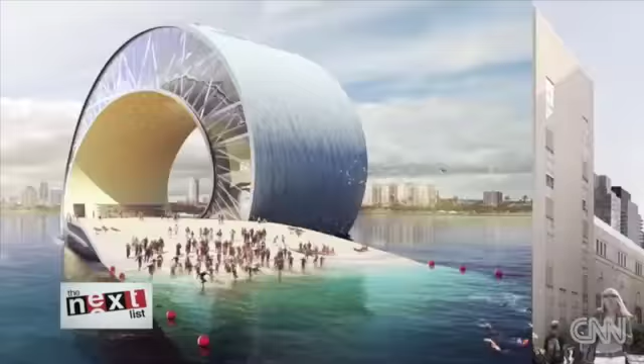If we could do anything, what would we really do? What are the things that we lack in our city? What are the things that we would like to do but that we can't? And then make them happen. That's exactly what architecture should be all about.

In the big picture, architecture is the art and science of making sure that our cities and buildings fit with the way we want to live our lives.

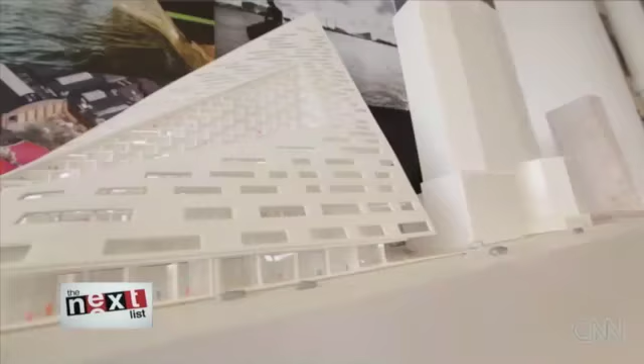The West. This is the West 57th Street project. As you can see, it's this mixture between a skyscraper and a courtyard building.

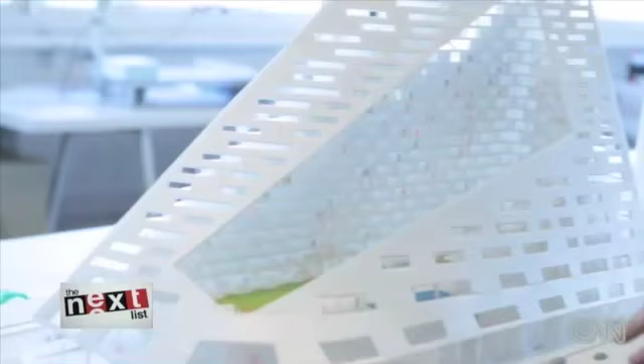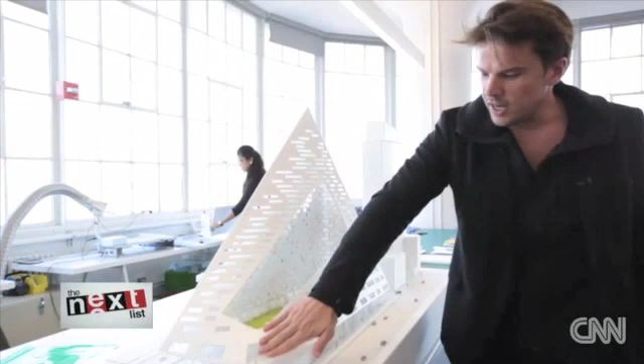To open up the courtyard for the views, it tilts from being horizontal to being almost vertical, opening up the entire courtyard for the sun from the south and the west, so you'll be able to see the sunset over the Hudson River. The bottom, like the southwest corner, is 42 inches, so it's really the height of a handrail. And here you're up at like 430 feet. So you have this incredible range from the human scale to the city scale in one single building.

It's a big idea that caught everybody's attention. It's the kind of idea that when you see it, you say, how come nobody's thought of it before? I describe him as a genius. He doesn't fit what you think of as an architect. He's brash, he's very young, but he is, I think, a true genius in the sense of being able to see designs in his mind and put them down on paper better than anybody I've met.

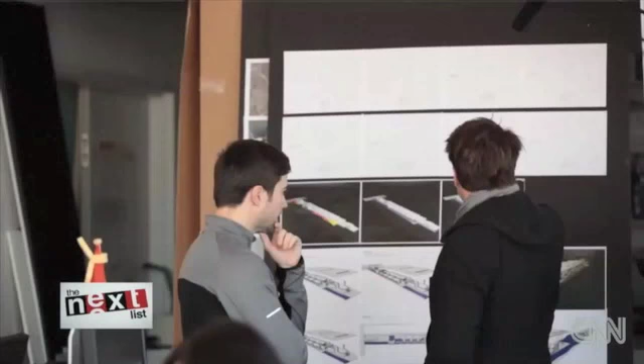Today, a lot of people have this feeling that they ask, why are all modern buildings so boring? Essentially, modern buildings have degenerated into these big boring boxes where the architecture is very passive, and all the quality that makes the space inhabitable is this onslaught of machinery that pumps air and light into the building. So what we're interested in is what you could call engineering without engines.

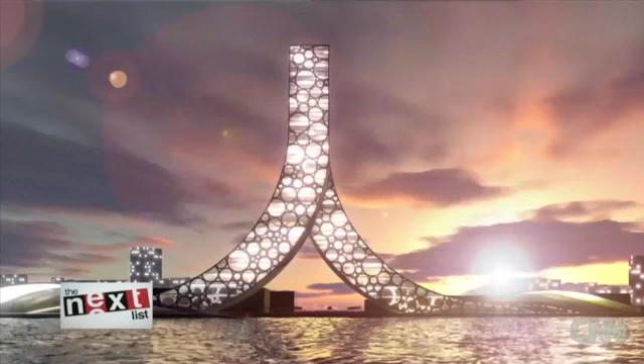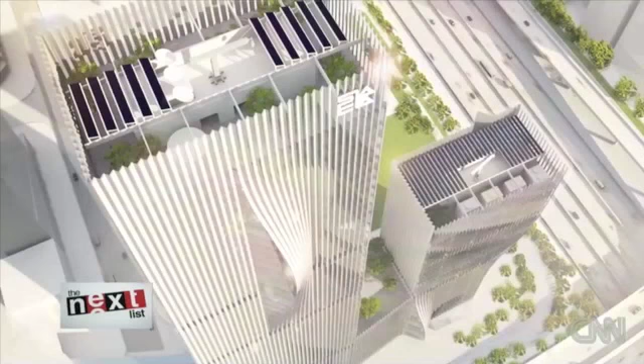We use contemporary technology, our capacity to simulate and calculate the performance of a building, to put that attribute into the actual design of the building - the way it's structured, the way the windows are proportioned, the way it's oriented to either capture the sun or create shade. So in a way, we find new ways of informing the architecture, the design of the buildings. Essentially, what we are interested in is buildings that look different because they perform differently.

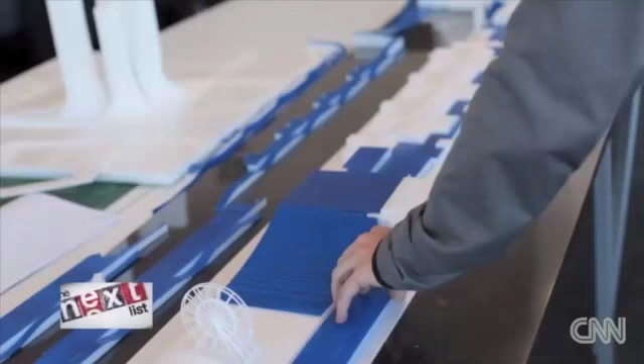Bjarke has that capacity to read deeply into the situation - the zoning, the economics of a project, the constructability of a project - in a way that most architects tend to say, oh, the zoning is constraining. He sees the zoning, I won't say as liberating, but as something that if you master it, you can move on to a higher level.

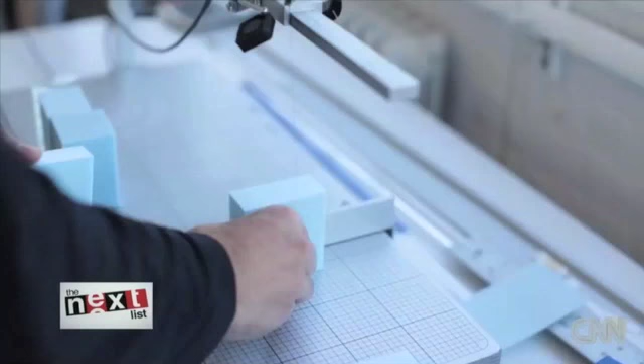I think all projects always start with some kind of anxiety that this time we're simply never going to get there. You have this feeling that maybe it's simply not going to come out, right? No matter how hard you squeeze, it's simply not getting there.

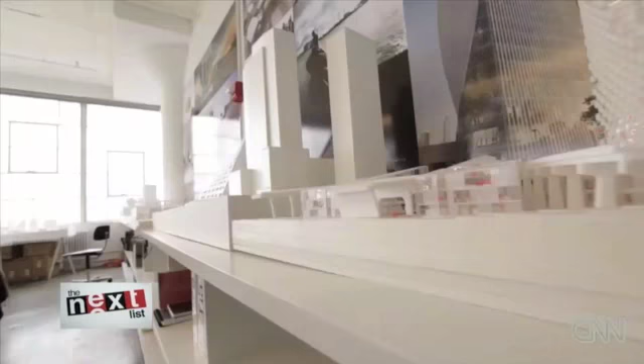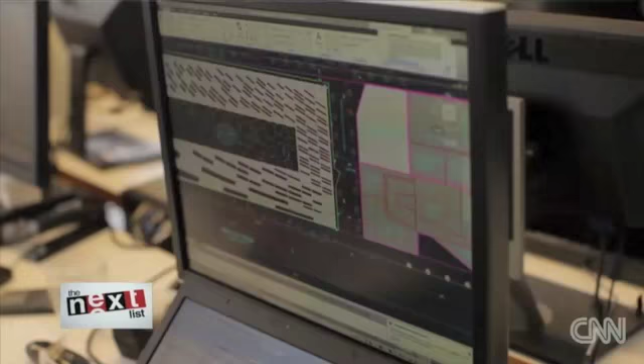So for each project, we might have like even 100 models that are each early attempts to capture an idea in its most blatant form. So no idea is allowed to exist only inside the head of one of the collaborators. It has to come out in a diagram, in a drawing, in a physical model. You might walk around with a brilliant idea inside your head, but because you don't bring it out there, I'll never be able to respond to it. Nobody will be inspired and nobody will be able to inspire.

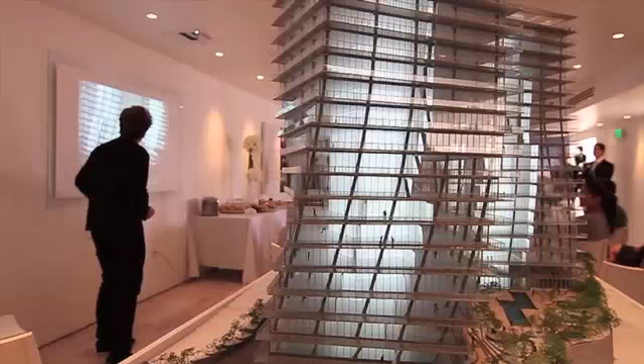It was quite easy to identify what this project was going to be all about, because you have the grove, you have the incredible landscape, and basically the best landscape architect probably in the country, if not even beyond.

We tried also to look at, let's say, the Miami vernacular, and one of the things, because having the pleasure of actually operating in quite a lot of different cities and different cultures and different climates, what we try to do is also instantly acquire some of the empirical intelligence that has already emerged in the local culture.

One of the things that actually works quite well with the Miami condominium is that by having really large balconies, you can combine the possibility of having generous views with having a lot of outdoor space and a lot of natural shade, so that in an environmentally intelligent way you create something that both maximizes daylight, view, sunshine, but also optimizes shade. And then finally, maybe the greatest resource we have right here in the first row out to the water is, of course, the possibility of capturing amazing views.

So we started this basic analysis: by necessarily having two buildings, we could easily get in a situation where, because of the neighboring buildings, on the lower floors, the most blatant way of addressing or capturing the view of the water is by looking straight perpendicular to the waterfront.

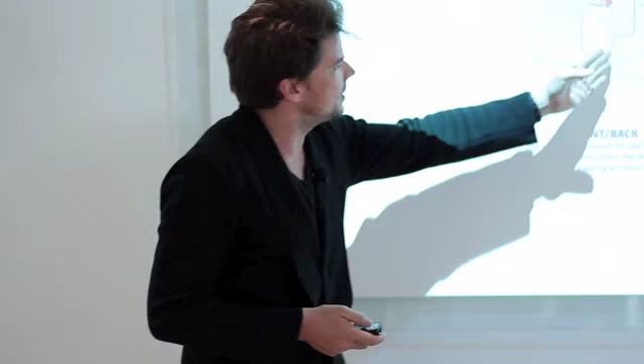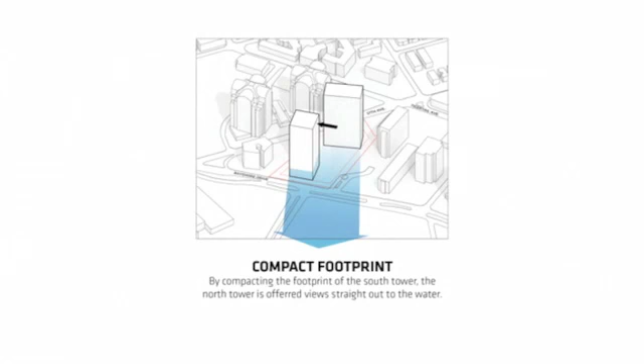That could easily create a situation of having the front building and the back building, which of course would detract - basically half the people would be in the back building. So what we looked at was by reducing the footprint of the front building to a square, we could open up basically all of the view on the lower floors.

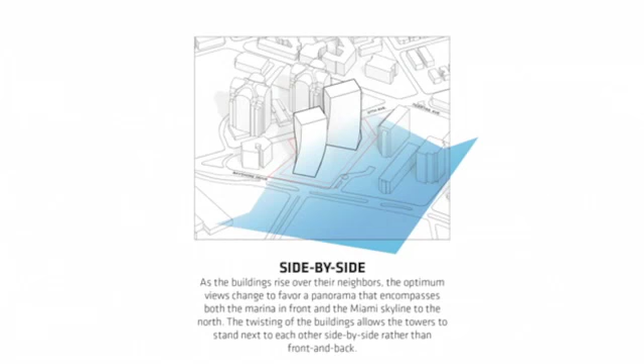And that basically gives you this idea that as the two buildings clear the context of the surroundings, they can actually have this more optimum position. And you also see that rather than being front and back, they actually become side by side, so they're both equally privileged.

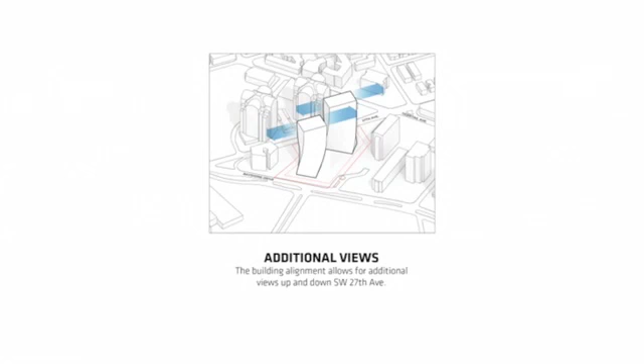They still dodge each other, so they also have secondary views in the other direction. That's essentially what creates the main gesture or expression of the building. The two buildings are not just condominiums that have been pre-designed in the office and then placed on the site.

They really emerged from the specific opportunities and challenges of the site. This is essentially the situation. We have the 12-foot ceilings, and you can see in the courtyard a sample of what a 12-foot sliding glass door looks like. It's incredibly tall, essentially the tallest hurricane-proof sliding glass door on the market, and that alone is a reason to move here.

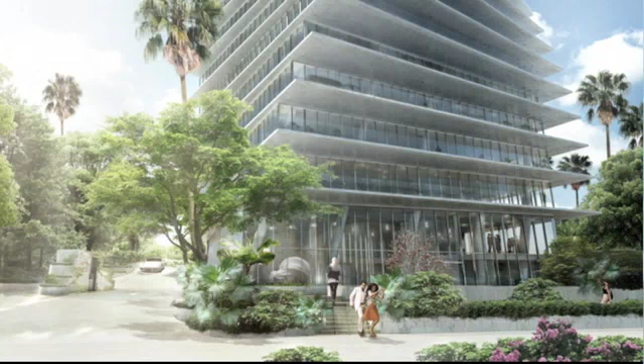So this is the arrival, the driveway from Bayshore, the incredibly generous lobby that also contains an art gallery and some of the amenities.

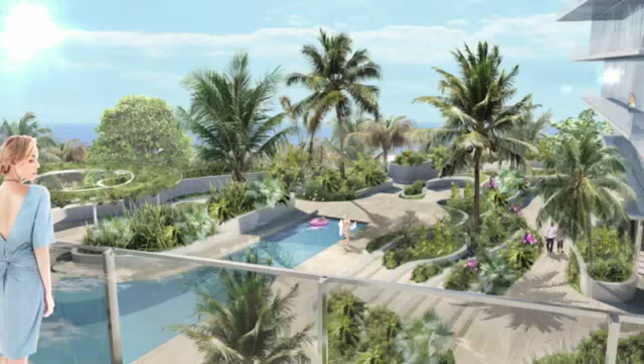This is the landscape. You can see these undulating topos. Essentially, when architects or landscape architects make models of landscape, we do these topo lines, and we try to turn the aesthetics of a landscape model into actual architecture. So these topos also become the steps that you step on, creating complete integration between nature and architecture.

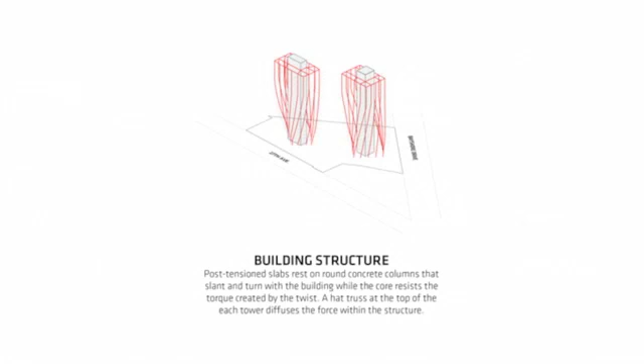And of course, the one gesture the architecture makes, which is the turning of the two buildings to become side by side, is made possible by essentially having straight concrete cores, and then these columns that follow the torque of the buildings.

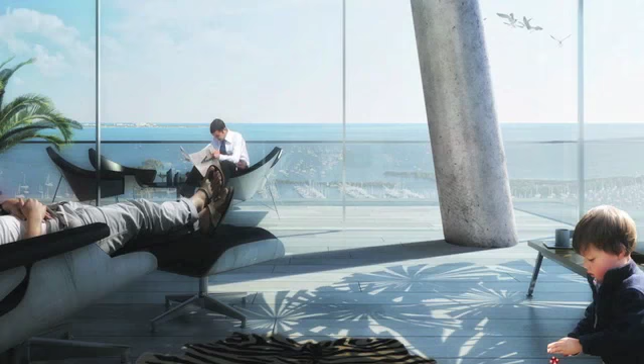From a distance, it gets this gracious, almost organic expression. But also, as you enter into the buildings, each of these columns we're going to leave exposed, high-quality architectural concrete, so they're almost going to be like little art pieces in each apartment.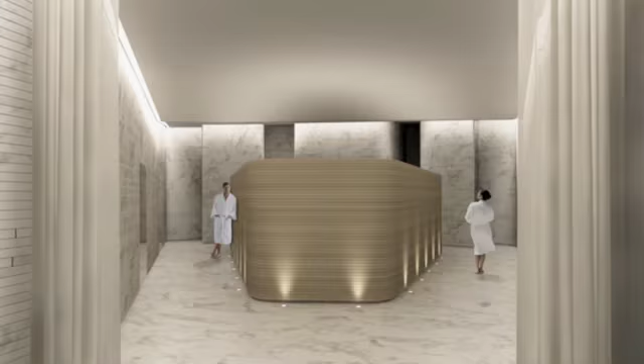Inside the podium landscape is a spa, fully equipped with all of the amenities, and again we're trying to work with an incredibly understated and elegant material palette.

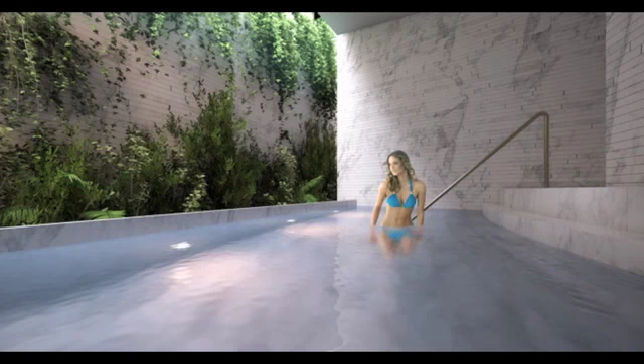In some places, we can actually capture completely secluded courtyards, where again we can bring nature even into the spa experience, which would really make it a very desirable place to go.

And we have a pet spa where we've decided to work with exactly the same materials we use for the human spa, because there's no reason to treat Fido any differently.

And then finally, as the last amenity, once you clear the canopy and arrive at the roof of the building, you have the sun deck. Again, the final appearance of the concrete core, and this incredible 360-degree view of the water.

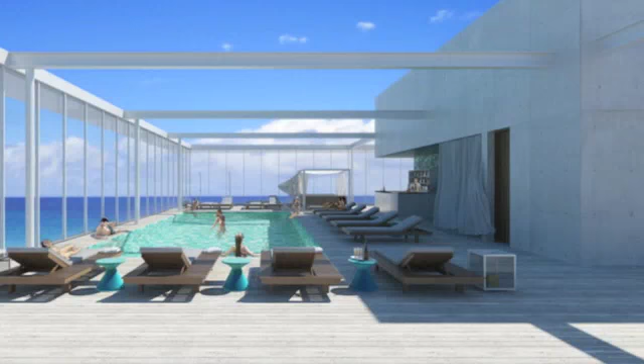Some of the upper units have their own little pool, and on both roofs there's a shared pool for the entire building.

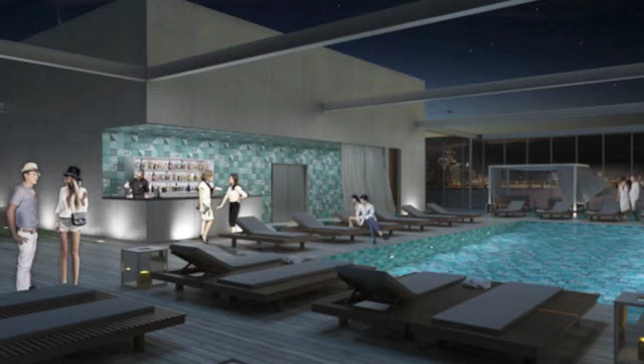And of course, at night, the idea is that when we excavate or scoop out different programs, in this case the bar from the core, this colorful pigmented tile reappears, and we also envision that would be the material inside the pool itself.

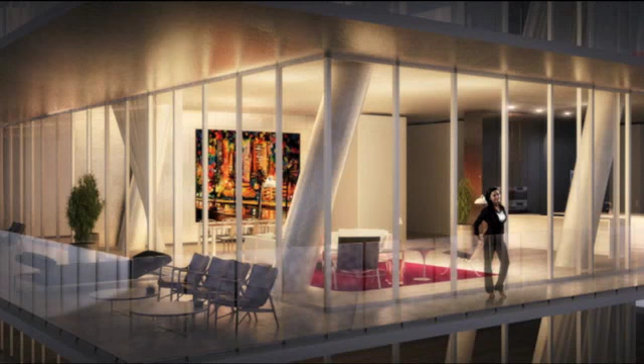The apartments have glass floor to ceiling all the way around, with incredibly generous balconies to extend the lifestyle outside, but also to create natural shade. Of course, you have the view down over the beautiful garden.

This is basically the situation: the incredibly generous ceiling heights, the abstract column, simple materials. In general, we've been working a lot with Alicia.

I think 90% of the work in this project has gone into those floor plans, because the core is straight, whereas the floor plates rotate, and it's only on the upper third of the building that everything sort of clicks into place. So we've been working with Alicia to make sure we capture the generous glass corners, so that all of the functionality makes it a completely effortless and elegant way of living.

This is an example of a kitchen, living, dining space. Again, we imagine the appearance of working with local woods or these colored tiles to give a little local flavor to an otherwise almost Zen-like simple modern architecture.

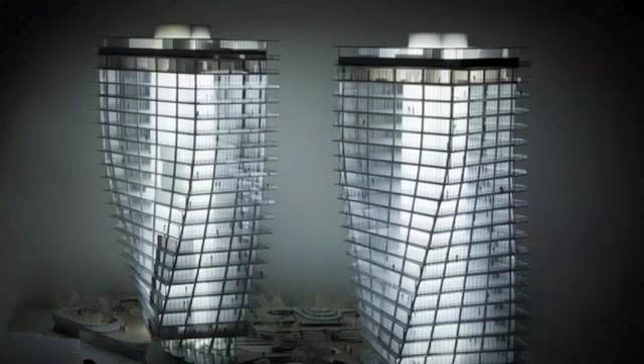And then, of course, also at night, for the pleasure of people passing by, you'll see almost like an X-ray of these sloping columns passing through the different floor plates.

So this is essentially the thinking. Just to capture it, I think basically what we tried to do was as little as possible that's necessary to get the maximum amount of these incredible qualities that you already have available with the grove, the weather, and the view of the water.